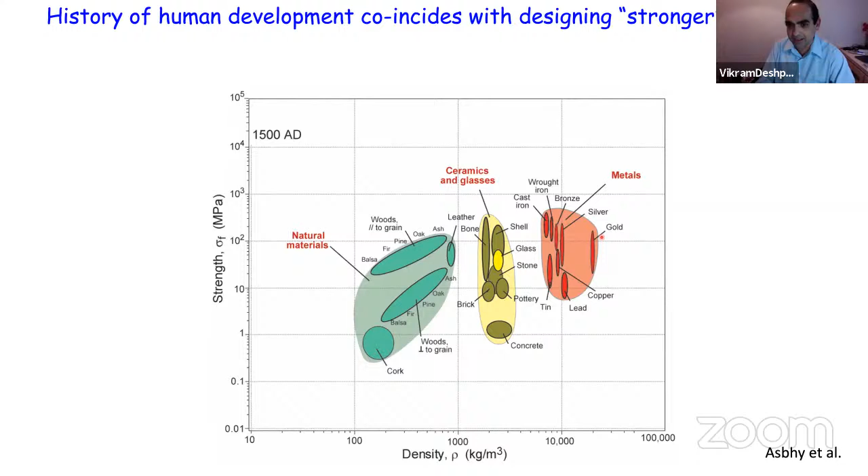Then if you go 1,000 more years, very little had changed. So from 50 BC to 1500 AD, not much had changed other than iron - some cast iron had come in. In another 400 years, you had added steel, which is a very big thing.

By the end of World War II, you had added some aerospace alloys, polymers had started to come in, and this is approximately what exists today as engineering materials. The main thing you can see is these low density foams and architected materials that have started coming in.

So there's this correlation between human development and designing of materials, and that has continued. Of course, in modern days you judge it by what science and nature papers you have, and there's plenty of papers coming out on which is the strongest, lightest material that you can make.

This is an Ashby plot, and effectively there are certain parts of the Ashby plot which cannot be attained. There are no materials that can ever be made there, by bounding theorems - you can't go out here. But there's lots of places where materials don't exist, but in principle materials could exist.

For example, the Hashin-Shtrikman bound with diamond as the starting point will tell you that a material in principle could exist along here, not that it has been made or we know how to make such a material.

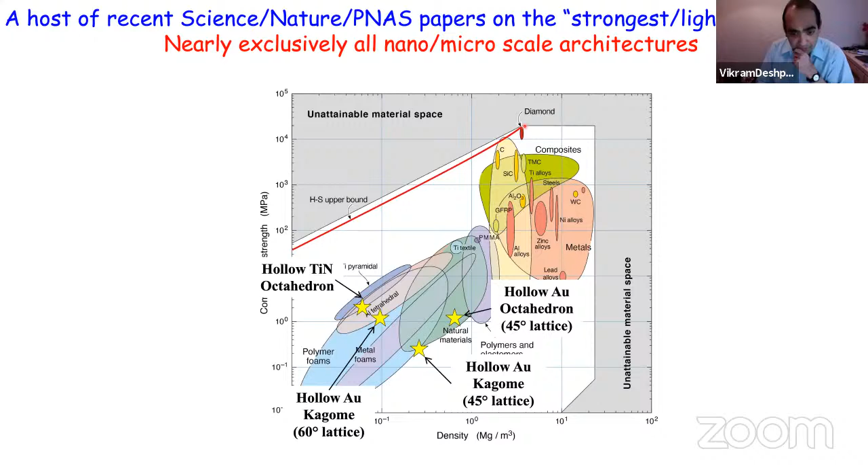So there have been lots of papers coming out with that, mainly nano and micro, as we were discussing earlier on. For example, I'm showing you some of the very early papers - these were all by Julia Greer, where they made nanomaterials, and they're sitting on the Ashby plot. Norman Fleck in his seminar spoke about gyroids, and this is where the gyroids will be sitting.

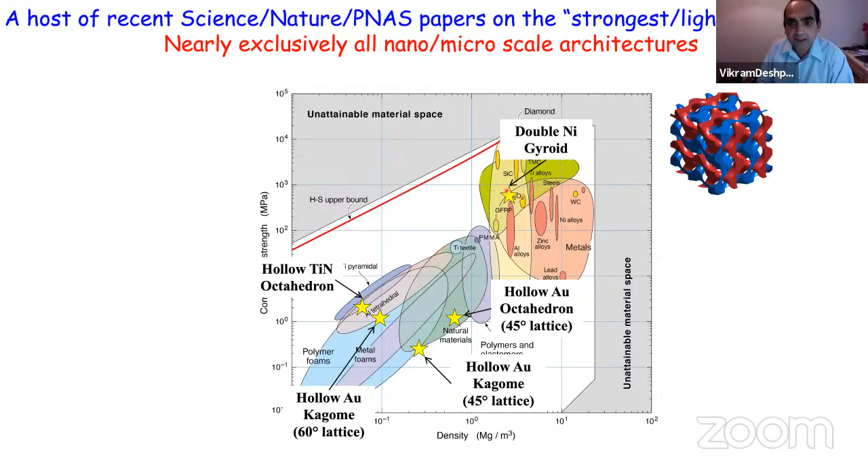Then there are papers coming out from the nanoscribe Karlsruhe group, and they're making materials - some of them, like this structure here, are truly getting into this kind of space in the Ashby plot. There are 100 other papers, which I apologize for not citing, where people have made lots of new materials which I have not spoken about here.

I'm sure there are other materials lying here too, but that's not the aim of this talk.

The aim of this talk is saying that suppose you can make these materials, what is it that you can do with them? I'm going to speak about one very specific application - there could be lots of applications to say that if you could make such materials, what would you gain?

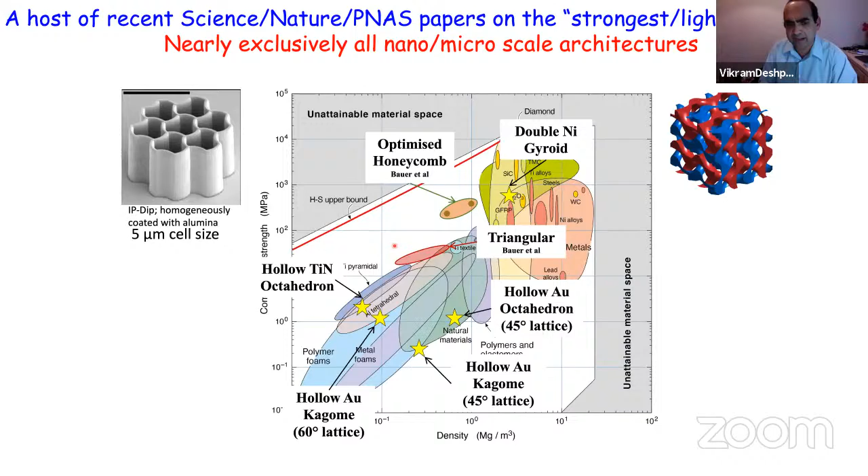The application I'm going to be discussing is mitigation against dynamic loads, because if you want to make strong materials, that's an obvious application, right? You'd think if you have something strong, it will work well for these kinds of dynamic loads.

So this is our structure, and there are two types of loads. You can have some buried explosive coming and hitting the structure, with a granular high velocity medium coming in, or you can have some kind of explosive with fragments coming from the side here, like that. So these are the two applications I will be discussing.

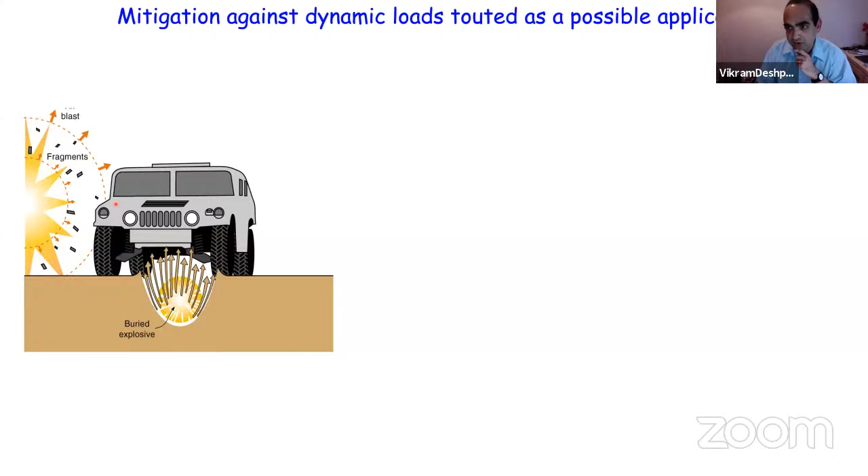So protection against high velocity granular impact - we'll think of sandwich structures with some kind of architected cores, which will help, and lots of different sandwich structures with different architectures. Similarly, protection against high velocity projectiles.

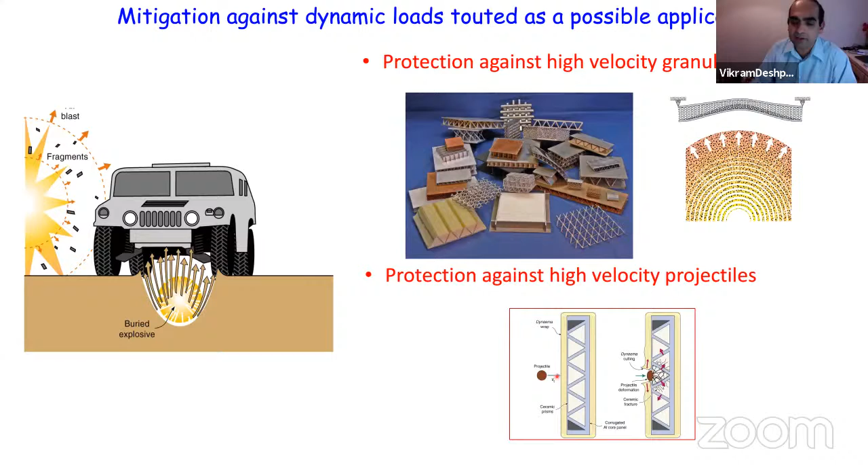What is it that you need? What kind of material properties do you really need to protect against high velocity projectiles? The underlying theme of the whole talk is: is high strength what you need for such applications?

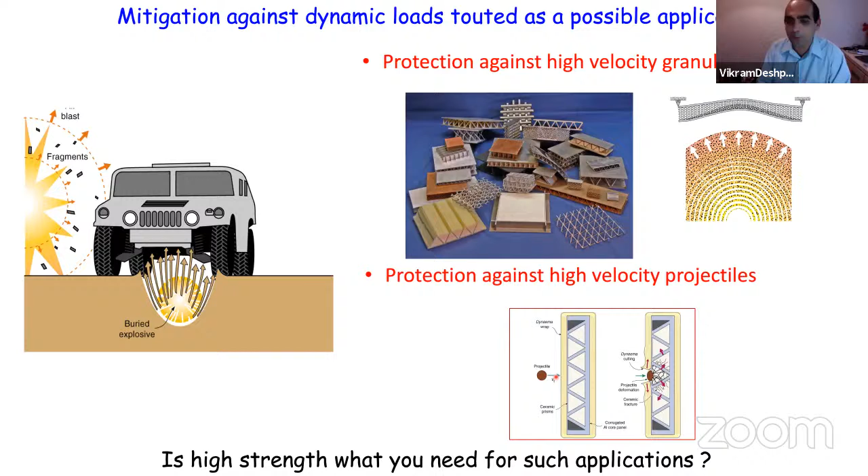You might say that's pretty obvious, that obviously I need high strength. But I hope to convince you by the end of the talk that it's not absolutely clear that high strength is always good. So that's going to be the aim.

Let's start with the first application: high velocity granular impacts. Whenever we talk about granular impacts, there are two problems that occur with dynamic loads. First, you have to understand how the loading was created on your structure, so we need to understand the interaction between the explosive, the granular medium, and the ambient air around it. Then we need to understand how the high velocity medium is going to interact with the structure.

So we're going to first quickly understand this explosive-granular medium-ambient air interaction, with a very simple experiment. My whole seminar will talk about simple experiments to try to understand these complex phenomena, and may or may not succeed in that, of course.

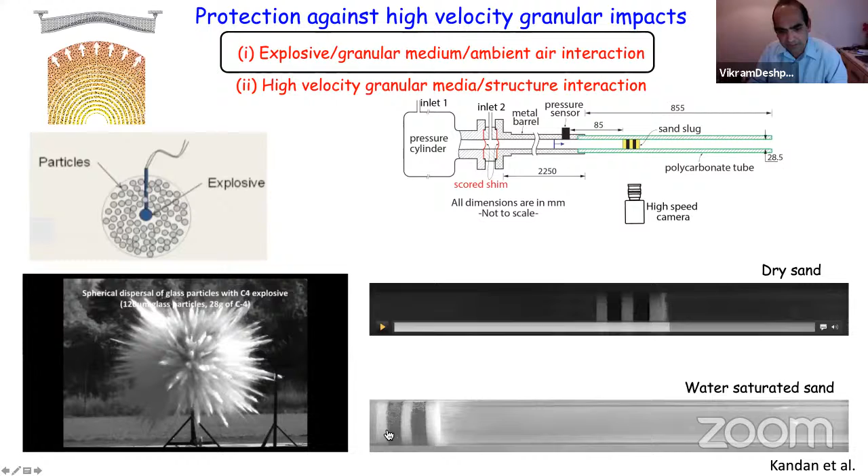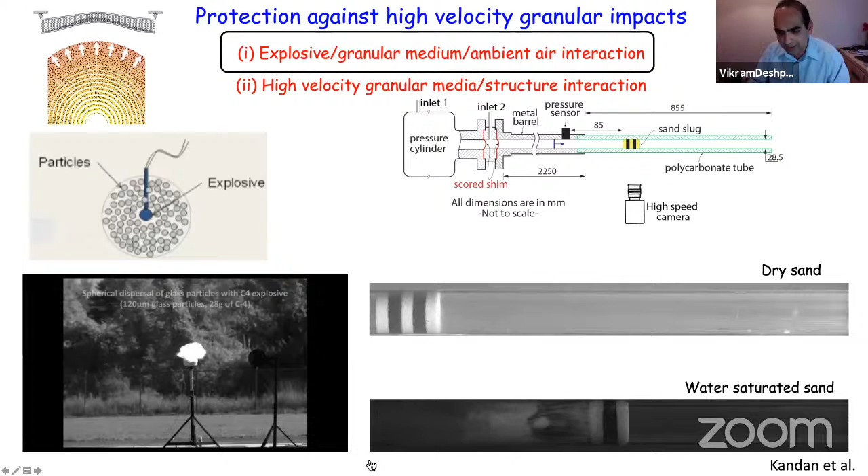Now you do that with water—if you water saturate the granular medium, this is what happens. Immediately, nearly on this rear surface, you get an instability forming, and you can see some kind of mixing and instability, but the front remains pretty stable.

So first, before jet formation—can we actually understand why this is happening? Can we do a really simple simulation to understand what's happening? This is my granular medium, described by a very simple, isotropic Drucker-Prager kind of solid.

What do I mean by a Drucker-Prager solid? It has some pressure dependency to its yield strength, and that pressure dependency is denoted by the friction angle, typical for a granular medium. But I'll assume non-associated flow, so the granular solid remains incompressible.

You do that, and you see what happens—you repeat that experiment now in the computer. This is the wet sand, and you do get an instability forming for wet sand, as you can see. For the dry sand, it's pretty stable, going very stably.

What is the difference in this Drucker-Prager solid between the wet sand and the dry sand? The only real difference is the friction angle. The friction angle for wet sand is nearly 0, while for dry sand it's pretty high, around 20 degrees.

So what's happening is that friction is stabilizing the fluid. In words: you have high pressure air interacting with this surface, and if the effective yield strength of the surface is low, you get something like a Rayleigh-Taylor instability happening on this face—the dynamic version of the Rayleigh-Taylor instability. What friction has done is that because there's pressure, it has increased the yield strength of that solid locally, and it has stabilized it.

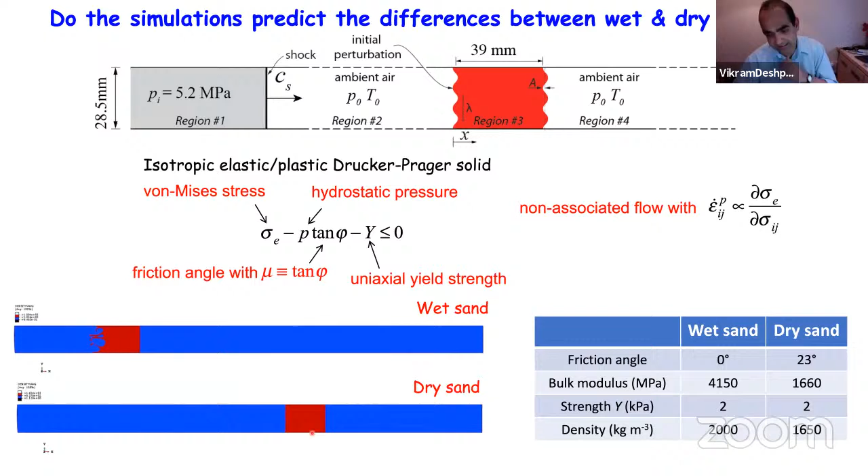That is the reason why you get this instability in wet sand, but not in dry sand, at least in this experiment. So the question is, why did you get this instability on the front face, with jets happening there? The answer is that it's really the Rayleigh-Taylor instability: when high pressure gas loads the granular medium, the surface goes unstable under dynamic loading conditions. When the granular medium moves through air very fast, it compresses the air in front of it, and that air exerts a back pressure, which causes the instability.

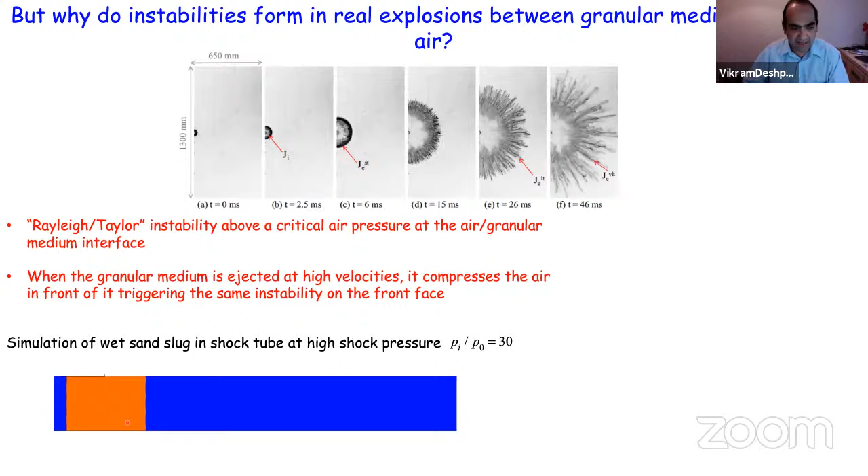If you simulate that, you'll see the front going unstable because there is air in front, forming that instability, and jets start to form. So why didn't this happen in my lab experiment, but it did happen in reality when that real explosive experiment was done? You need to move that slug really fast to compress the air in front of it sufficiently to create enough pressure to cause that instability.

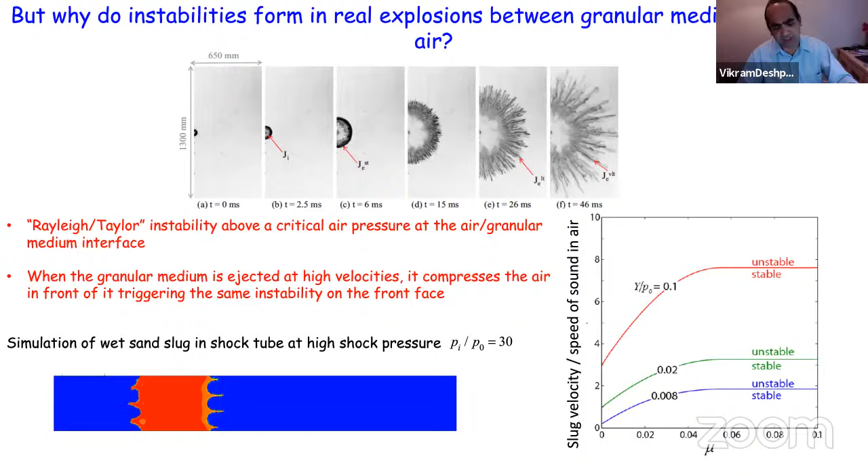So now we've understood how the granular medium moves through air. The next question is, how will this granular medium interact with the structure? We're now coming to the structure problem. Think of this: the granular medium is coming through, hitting this rigid structure.

The sand that has hit this structure has already densified, and as more sand comes in, you get densification here. This sand up here knows nothing about the existence of the structure, it's just coming, and you get a sharp densification front - a shock front. This is densified material down here, and non-densified up here.

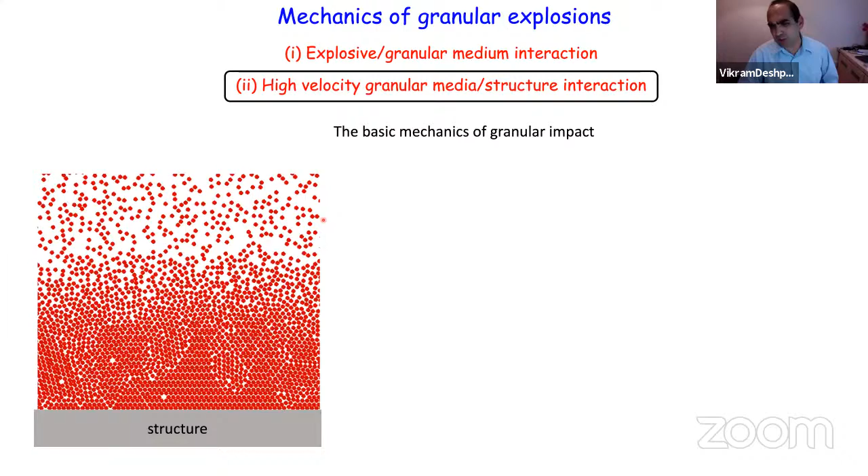This problem can be relatively easily understood with really basic mechanics. You can think of this as a simple material which has zero strength until you compress it and it reaches some densification strain epsilon d, and then it locks up. Thinking of it that way, you can understand what pressure this thing will exert on the structure as it impacts, by conserving momentum and mass across this shock front via two simple momentum conservation and mass conservation equations.

You get a Rayleigh construction, which tells you that approximately the pressure exerted on the structure is rho v squared, where rho is the effective density of the sand, the smeared out density. So it's basically telling you that it's exerting a hydrodynamic pressure on the structure to a first order. This is really very basic mechanics.

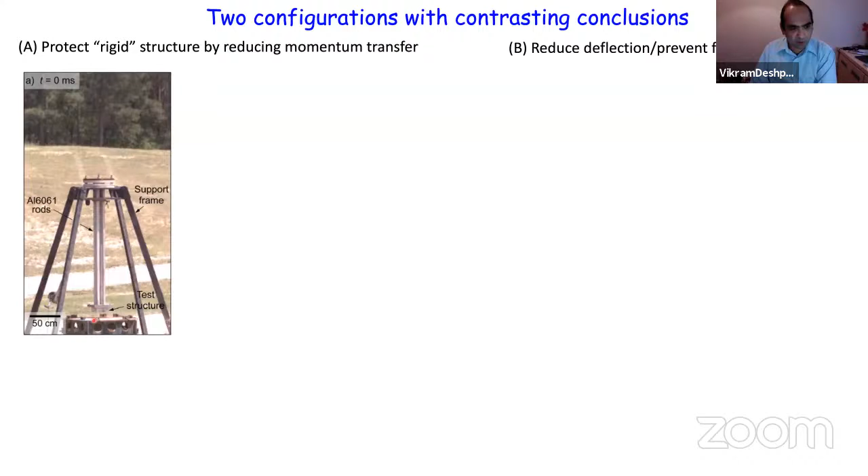Now we want to understand what happens if you have this high velocity granular medium impact a structure. What kind of structure do we want to design? For that, we need to define some kind of realistic situation, and there are two situations we'll think about - these were some experiments by Haydn Wadley. You have a structure where you explode something here and the granular medium comes and impacts it.

What happens is that the granular medium just makes the structure jump upwards, as you saw here. Why is this interesting? Well, if you thought of that vehicle, you have an explosion happening underneath, and the vehicle jumps up in the air because of the momentum transferred to the structure. So the question is, can we reduce the momentum that is being transferred to that vehicle?

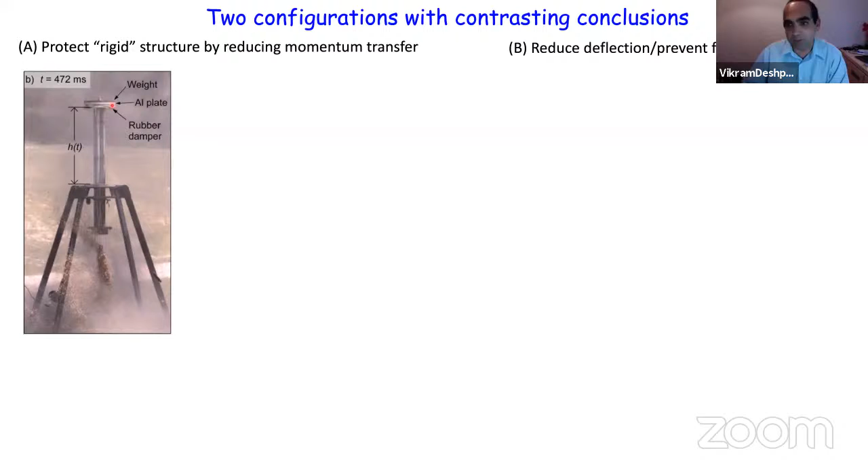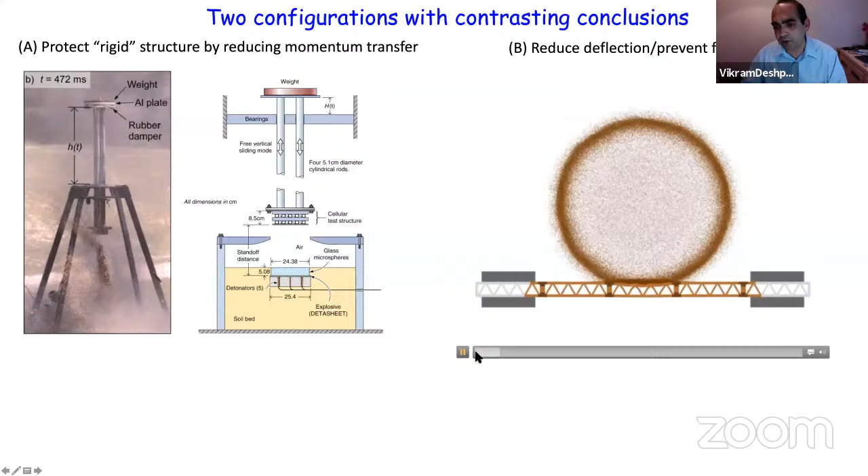Can you reduce the jumping up of the structure? That's one possible question. Another is to design an apparatus like Haydn Wadley's. Or suppose you just want a plate and want to stop its failure against granular impacts—what's the best sandwich structure to design for that?

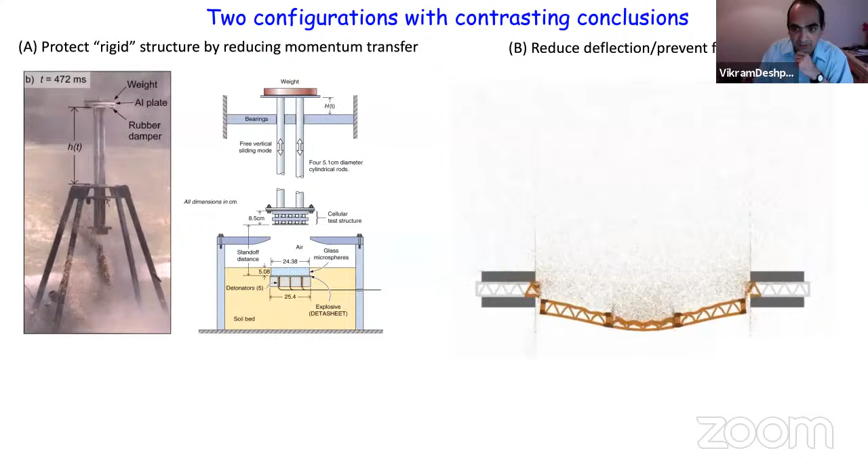Let's think about the first problem, the jumping problem. We're considering a cellular sandwich core with a face sheet, and granular ejecta coming and hitting the structure. We're plotting the momentum transferred to the structure, measured and divided by the momentum that would be transferred to a rigid structure, against the strength of this cellular medium divided by the hydrodynamic pressure the sand exerts.

What you see is interesting: there's an intermediate value of this non-dimensional group, strength of the sandwich core divided by the pressure, at which you reduce the momentum by about 30%. This solid line is a prediction I'll explain. So you don't want a core that's too weak, and you don't want one that's too strong either—we'll try to understand why.

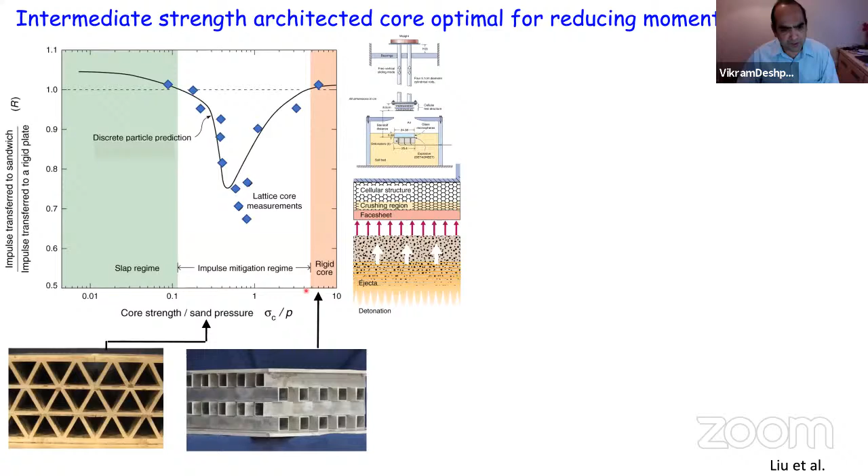You can design different architectures for these different strengths. An intermediate strength would look like this architecture, a stronger one would look like this. A high strength core doesn't do anything because it behaves like a rigid plate—it doesn't deform, so you go to the rigid plate limit at high strength. The question is what's happening at low strength and intermediate strength: why does low strength transmit so much more, and why is intermediate strength optimal?

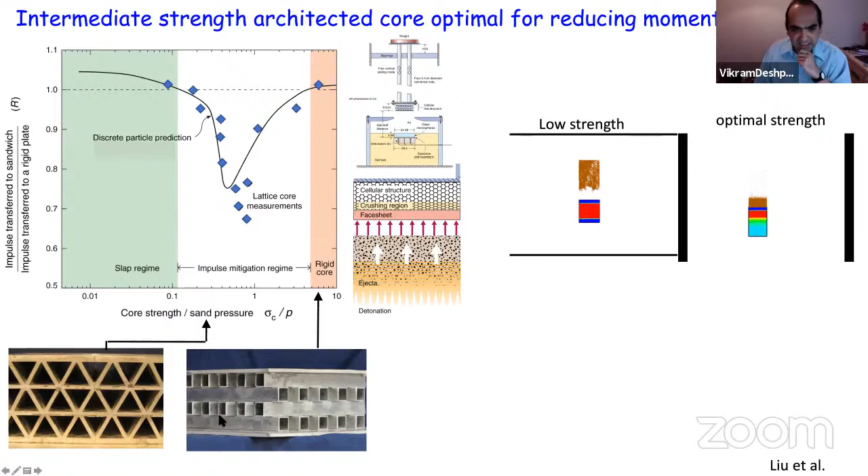In these intermediate strength cores, you basically get a plastic-like collision. The lesson we've learned is that once we know what strength we want, we could in principle backtrack to find the architecture of the core we want. But the lesson here is that you don't want something too strong, and you don't want something too weak either.

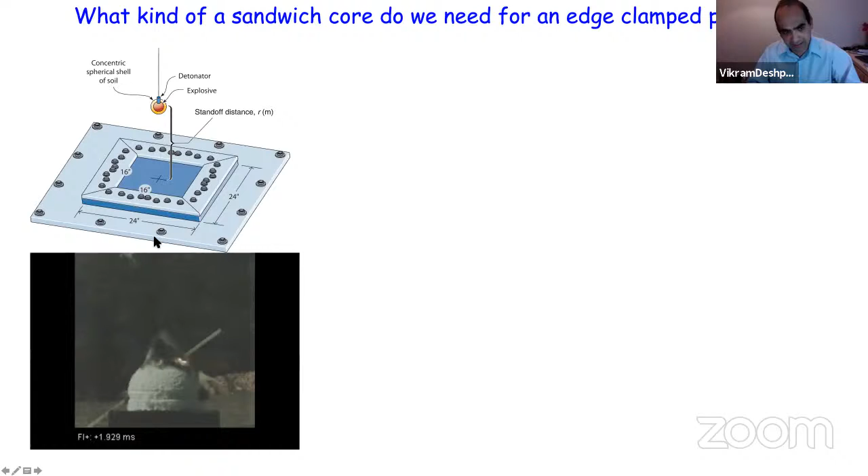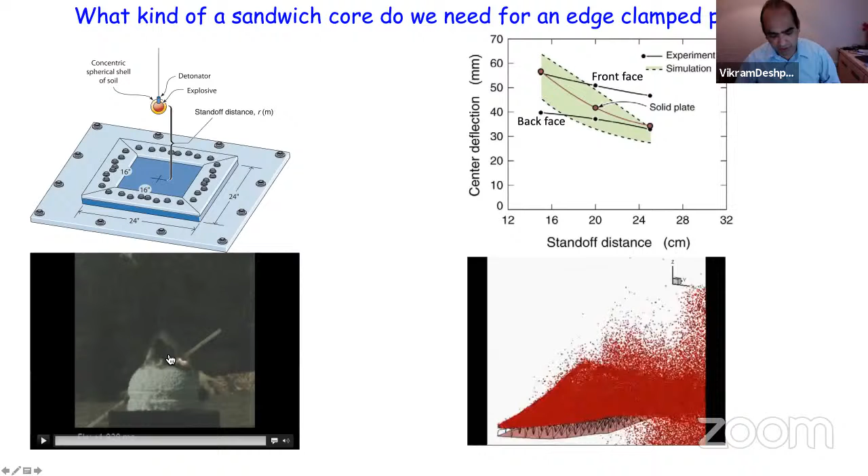At this point, there's some evidence to suggest sandwich plates, with appropriate cores, are doing better than the solid plate. But I'm not sure, because there are too many uncertainties with this real explosive event. So we go back to our Cambridge lab and ask: can we do simpler experiments, much simpler, where everything is well controlled? Because it's well controlled, we'll be able to simulate it.

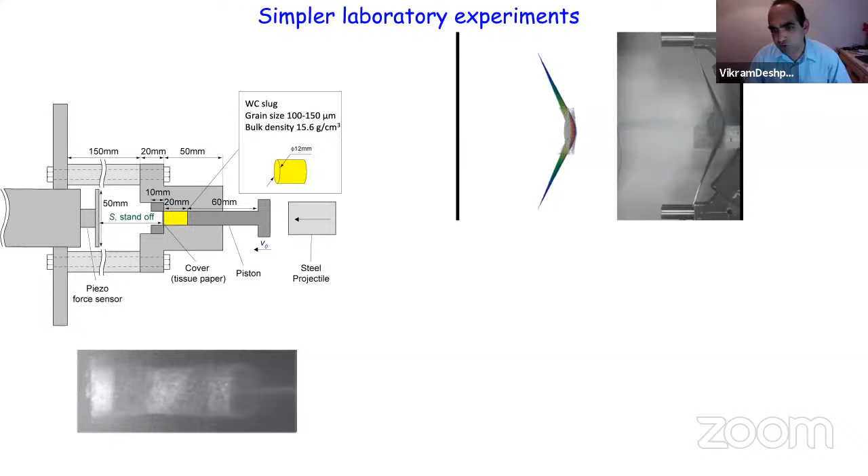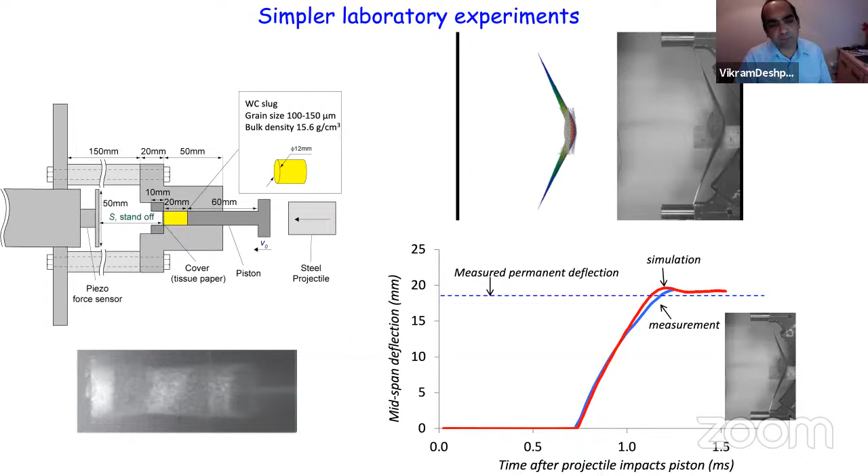We're getting extremely good agreement between the experiments and simulations, including if I just plot the mid-span deflection as a function of time—it all looks rather good. This tells us we've got a good simulation capability and good handle over the experiments, and now we can really use these experiments to probe what we want in terms of the design of structures that will help.

So again, we're going to do baby experiments, and the aim isn't to say what the core of the sandwich should be, but to ask what properties we need for the core. We take these types of sandwich beams—they all have simple hexagonal honeycomb cores—but interestingly, because hexagonal honeycomb has anisotropic plastic properties, we can play lots of games.

I can change the thickness of this core. I can rotate the core in the LW plane, and when I rotate it, I keep the compressive strength in the T direction the same, but change the shear strength in the longitudinal direction of the beam.

So I can make a core with high compressive strength and high shear strength. I can make a core by rotating it in the T plane, having high compressive strength but low shear strength. But if I rotate it completely, so it becomes like a hexagonal honeycomb where this is the in-plane direction—W is now the vertical direction—then I've got a core with low shear strength and low compressive strength.

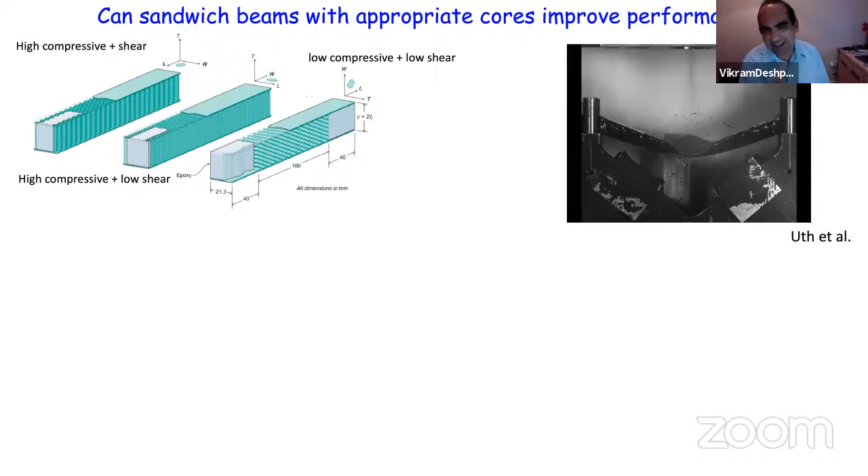So then we can try to understand what we really want from these sandwiches to get optimal performance. We do these kinds of experiments, impacting sand slugs—actually tungsten carbide granular particles—against these beams, and this is the sort of deflection we can measure.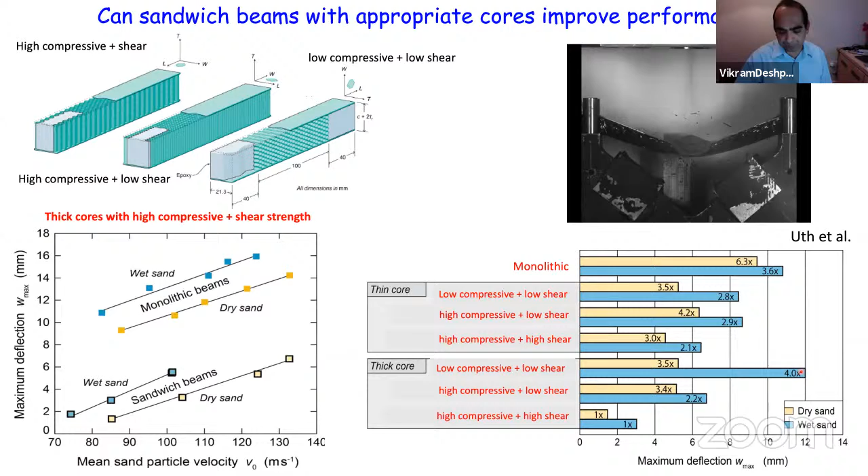So in this particular case, high strength is extremely good, and you need thicker cores rather than thinner cores to help. Though, of course, in some cases thick cores, if very badly designed, can do rather badly. So we use simulations to really try to understand why this is the case - why high strength thick cores are optimal for this particular application.

So the question is, why is it the case that the simulations behave this way? The answer is rather simple: as you increase the core thickness or core strength, you decrease the core compression. When you decrease the core compression, you retain the bending stiffness or bending strength of the sandwich beam. This is traditional sandwich theory, telling you that if you separate the face sheets by a large amount, you increase the bending strength.

That is the simple reason why you get this effect of a thick core and strong core helping. To explain this visually: as you increase the core strength, you hardly compress the core. A weak core is compressed a lot and loses all its bending strength, while a strong core retains the separation of face sheets and retains the bending strength, performing well. If you increase the core thickness, the same thing happens - in the highest strength case, you've retained this separation, giving you the good effect.

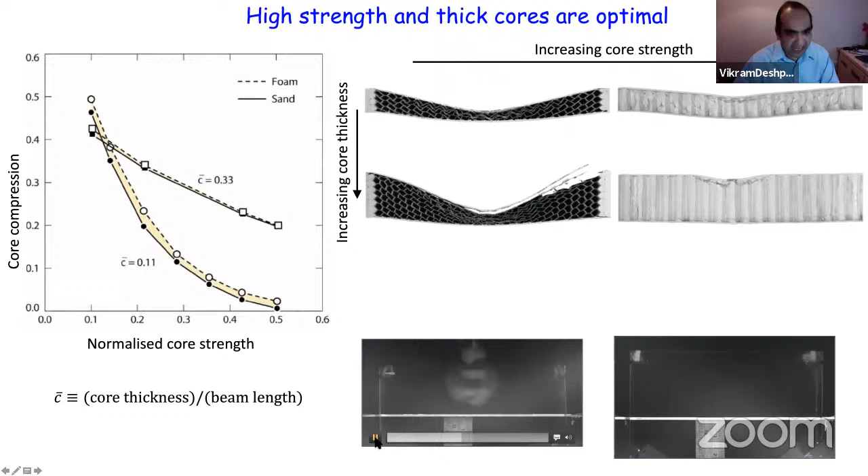Now, in these simulations, there's one more thing shown here - we've shown simulations of what I'm calling sand impact and foam impact. Now, what is this foam impact? Because I've been talking about sand impact all this time. This is the sort of impact event we have been discussing until now, where sand comes and hits it.

And this is the foam impact equivalent. What you can see is that a piece of metal foam is doing something extraordinarily similar to the sand, in that it's just compressing itself against the structure it comes and hits. What I'm showing here is that if you take a metal foam of the same momentum as the sand, both via simulations and experiments, you get behavior that's very similar.

Now why is this important? It's important because doing these sand experiments is extremely difficult, while doing these foam experiments is much simpler. So I'll proceed by basically always using these foam experiments from now on, because they're so much simpler to do rather than using the sand experiments.

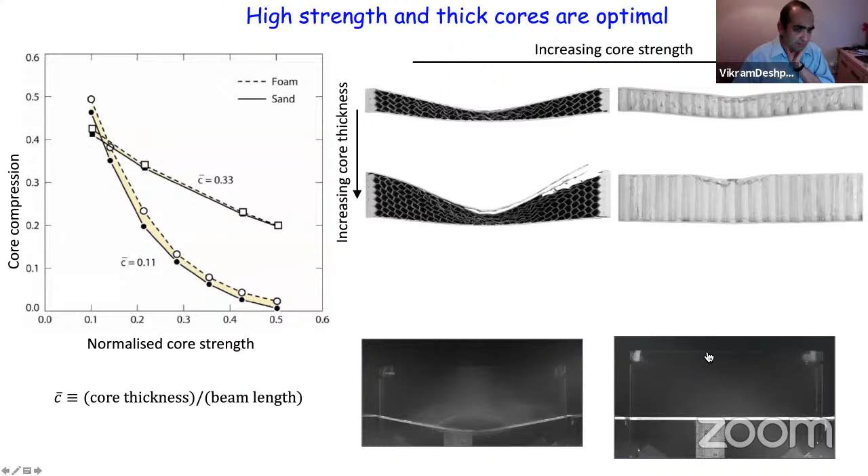So we are saying that these sandwich structures can do remarkably well, but I've looked only at metallic sandwich structures. The question is, can we do much better than these metallic ones? We go back to these Ashby plots and ask, what happens if you make materials in here? Till now we've been making these kinds of metallic cores. What happens if you make

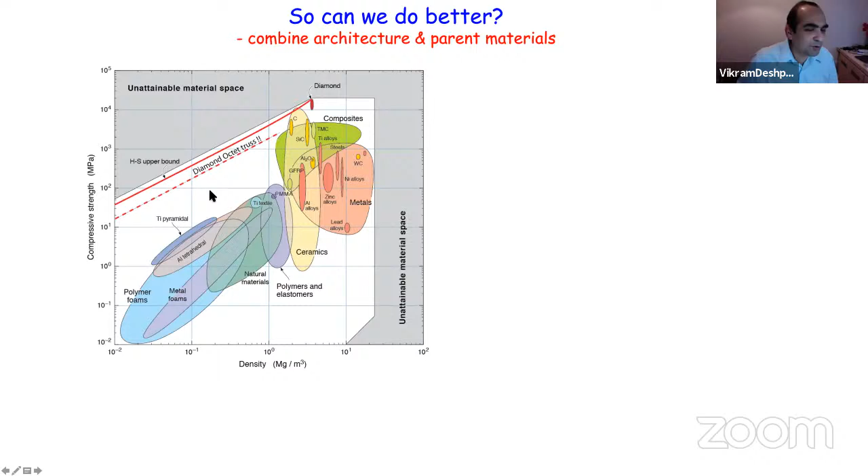architected materials sit here? In principle, we could make the so-called octet truss with diamond. That's not practical, of course, but what would happen? I'm going to talk about something much more practical and say, let me make materials in here, and they're actually not that difficult to make if you give up on metals and go to carbon fiber composites and other sorts of composites. If you go to other composites, you can make architected materials that live here. So there is some hope to do even better.

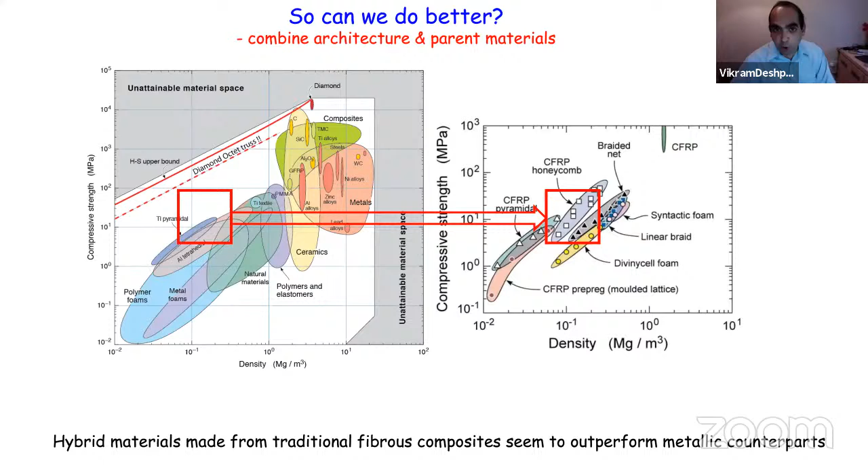But unfortunately, there's a catch, and let's explain this. So this is a honeycomb, a sandwich panel with a square honeycomb-like core. If you make it out of stainless steel, these are the deflections as a function of the impulse, and these are measurements. But if you make it exactly the same mass and make it out of carbon fiber, you're doing much better than the steel.

But the catch is that carbon fibers are brittle, and because they're brittle, they fail here. While the metals will not fail, they will just continue to go up to much higher impulses and deflections—they're ductile. The carbon fibers fail, and this simulation shows the carbon fibers have completely failed; they have a 1 or 2% failure strain. Nobody is going to use a structure that does better if hit slowly but completely collapses if hit hard. Nobody will actually use such a structure.

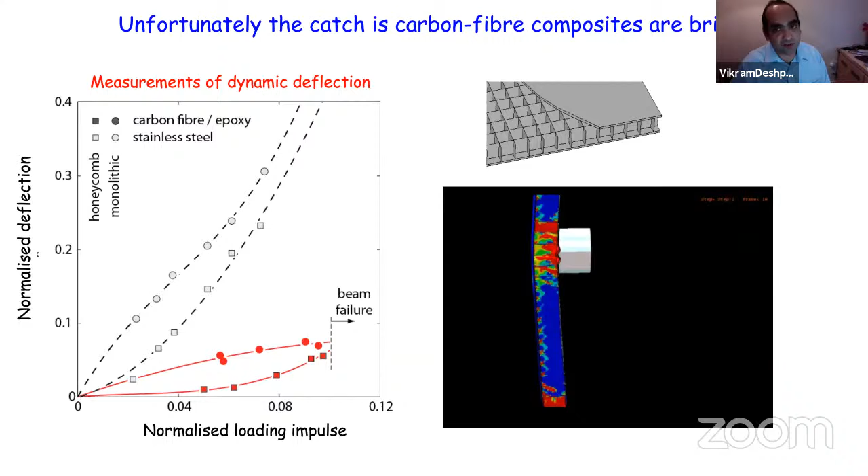So the question is, can you make carbon fiber composites more ductile? That's a tricky situation, because the carbon fiber itself has 2-3% ductility at most. So how can you make carbon fibers more ductile? Again, we will try to see whether

architecture can help here. So we're thinking of a composite which is 3D but non-woven. You have tows in 3 orthogonal directions, interwoven—not woven, really. These are what they call in the carbon fiber literature, 'noobed,' basically just interlaced in some way.

And we do a compression test in that Z direction. We are effectively compressing these Z direction tows because the other tows are doing very little. We plot the compressive stress against the compressive strain for 4 different experiments, loading and unloading. Look at the strains reached for specimen D—we could have gone much more—we reached compressive strains of 10% or so, with no sign of catastrophic failure.

There is, of course, nonlinearity. There was an elastic regime, and then a nonlinear regime. When you unload, you're basically returning nearly to where you started, with no catastrophic failure that typically occurs in the compression of carbon fiber composites. Why is that the case? It's interesting, because here we're showing micrographs of specimens A, B, C, and D after the unloading event.

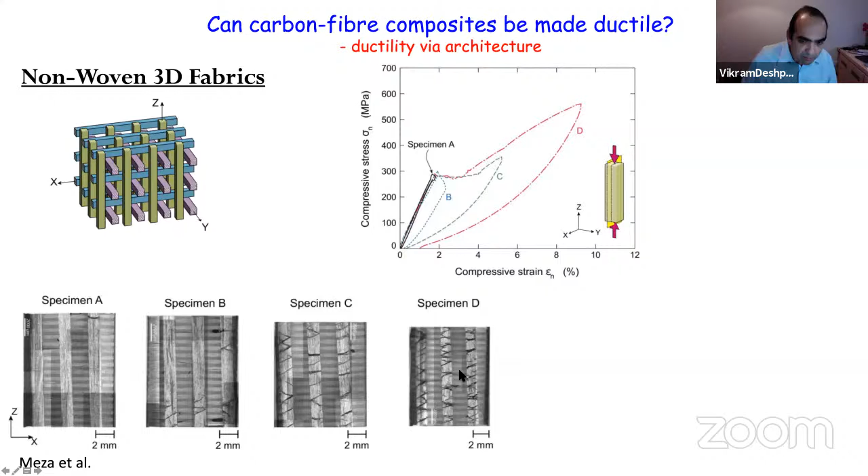Specimen B, you can see these are those Z direction tows. You can see some kink bands. In specimen C, you can see more kink bands. In specimen D, you can see even more kink bands.

Now, this is really interesting because if you look at it more closely, you see that this is a traditional kink band in the sense analyzed by Budiansky and Fleck and many others, where these fibers have kinked here and you're getting kinks. But in normal carbon fiber composites, you get a kink that completely traverses the specimen, and you get an unstable failure occurring.

But here, what has happened is that you're getting the kinks zigzagging. Basically, they reflect inside the tows, and you're getting a rather stable situation. So all that's happening along this curve is that you're getting more and more kinking.

So while, of course, we have not changed the ductility of the carbon fiber itself, the overall specimen ductility has gone up more because you're consuming the tows with these kink bands rather than just getting one kink band that goes unstably across the structure. So that's what's happened in this case.

Now, this translates into shear as well. This composite is extremely ductile even under shear loading, and this is the experiment to show that it's 50% strain and it's still not undergone catastrophic failure. Although the reason for this ductility in shear is very different: you've got fibers in all directions, so you don't get these kind of delamination failure events that occur in typical, at least 2-dimensional, composites.

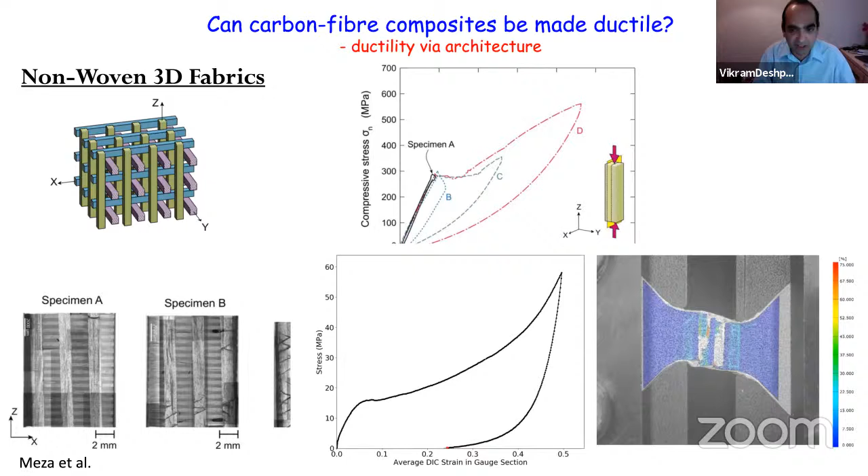Okay, so we need new models to account for these cases, because the strains are so large the tows evolve in microstructure. So we analyze each tow separately, discretely, by a crystal plasticity model with 6 slip systems in each tow, because we think of this toe, with these fibers in the toe, as having discrete slip systems within each toe.

But there are only a limited number of available slip systems, under which otherwise you'll have to get elastic deformation of the fibers. There's something more interesting too: these fibers are rigid compared to the matrix, so this is like a granular medium. And like any other granular medium, you'd expect pressure sensitivity, because effectively as these toes move, they have to move apart a little bit, so there's some kind of local dilation effect happening. So this is a straightforward crystal plasticity model with pressure dependence included.

And if you use that—this is Lucas Meza's work—when you do this compression test you can see that you start predicting these kinds of kink reflections, etc. And all the tows are discretely modeled.

Similarly, if you start modeling those shear experiments, the black line is the experiment, and the orange line is the crystal plasticity model with the pressure sensitivity. If you don't include the pressure sensitivity of the shear strength in the tow, then you start under predicting the experiment. This is really important because you'd think this is a shear test—why would I get pressure building up at all in these specimens?

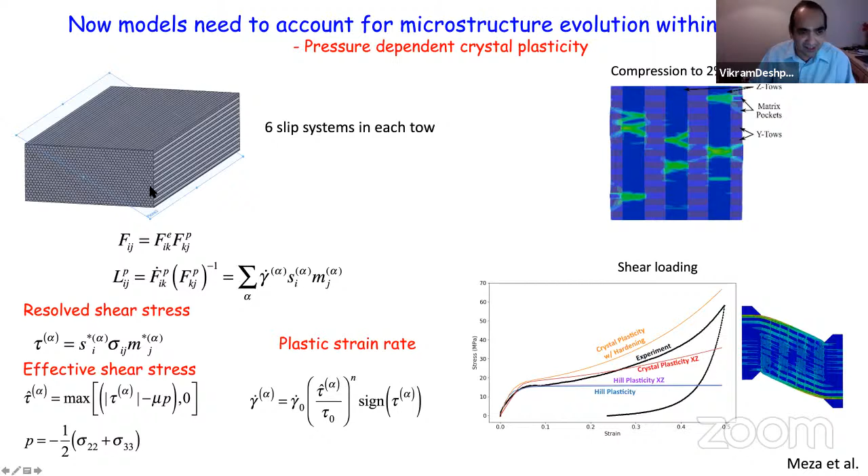You might also say, why did you do all this complicated crystal plasticity? You could have just modeled each tow as a Hill plasticity model with all the anisotropies. And if you do that, that's this line here—hill plasticity basically does not predict the hardening that you're getting. This hardening is because the microstructure within each toe is evolving, which is captured by the crystal plasticity. If you did hill plasticity, you just wouldn't capture it. So you need all this complication to capture what are relatively simple tests.

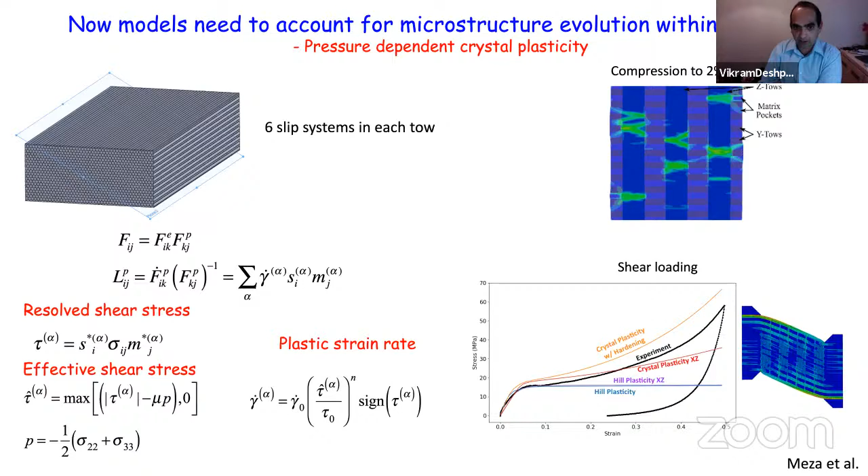Okay, now that we've convinced ourselves that we can make ductile composites, what happens, right? Can you do now better?

So now the problem that occurs is if you want to really use these composites for those kinds of structures, you need to avoid the joint failure problem in composites. This is always a problem in composites, that you get massive joint failure. This is a Swedish company that really helped us make such sandwich beams by a complicated weaving process.

What they have done here is that there is no joint within the structure. A fiber that starts at one end of the structure ends at the other end, and that's it. You can see what's happening at the joint: a fiber comes this way, goes that way, and goes back upwards, etc. So effectively, it's a completely integrally woven structure, much like a natural structure, like when a branch comes out of a tree, there's no connection—the fibers on the branch come into the tree trunk, etc.

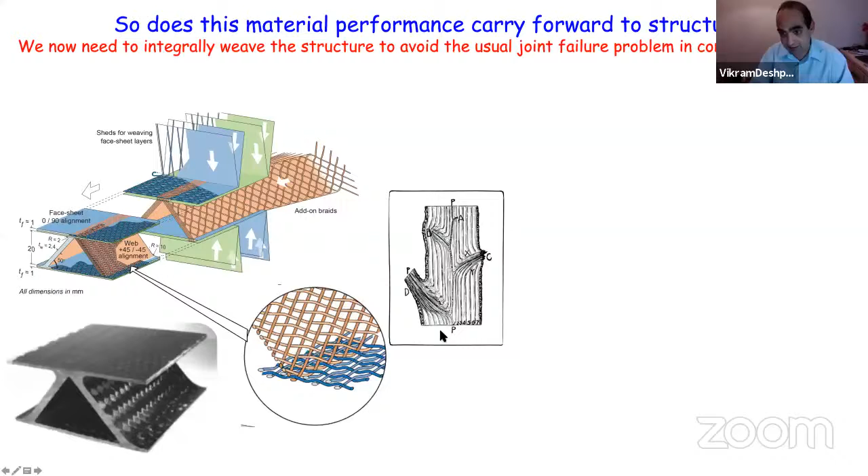Now, if you repeat this experiment with the metal foam rather than the sand projectile, this is what you get: you hit that composite structure and break the metal foam. The front face has failed, the back face of that sandwich beam has not failed, but the metal foam has gone. We make an aerospace grade aluminum structure with the same mass, same topology, and everything else the same. It's extremely ductile, the aluminum structure, but it still doesn't do as well as this effectively three-dimensional composite structure, because you can see that it's just failed in this manner.

Now, we are not capable at this point of modeling these kinds of experiments, because all the modeling I showed you was required every tow in the structure to be modeled discretely. And we are not capable of modeling every tow in this structure discretely. There has to be some kind of homogenization that we'll have to do, but we haven't yet come to doing that. Okay, so that was problem number one.

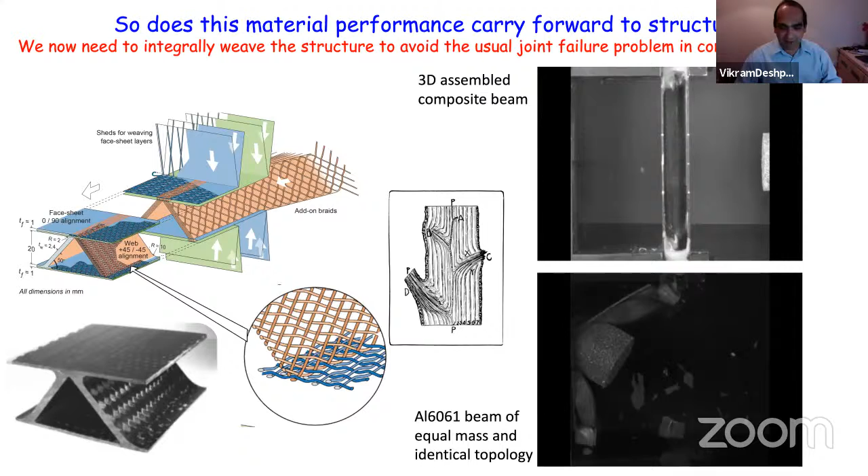I'll go on in the next 10, 15 minutes to talk about problem two: protection against ballistic threats. What do I mean by ballistic threat? You have some impact event happening like that, and the question is whether this thing, the projectile, goes through or not.

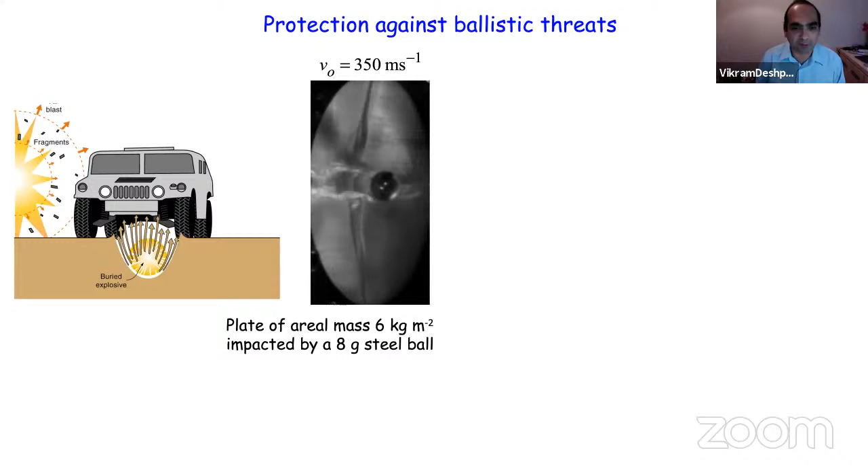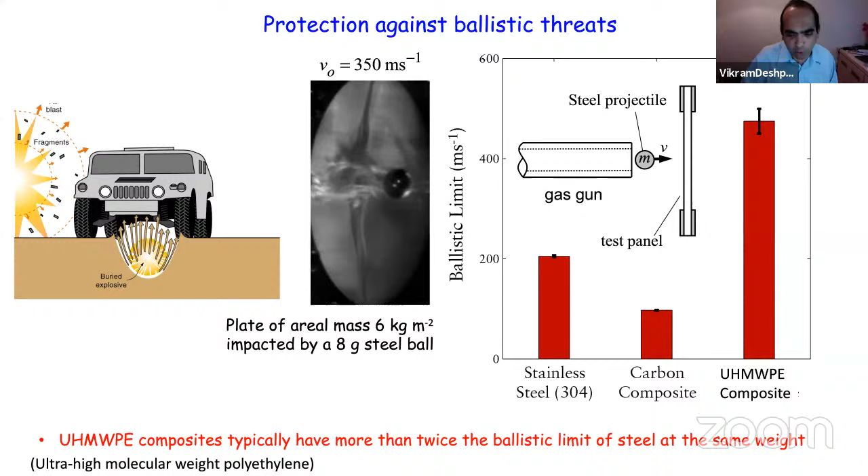So if you basically take three different types of plates made out of steel, carbon fiber composites, or what I'm calling here ultra high molecular weight polyethylene composites, this ultra high molecular weight polyethylene composite seems to do remarkably well. They have twice the ballistic limit of steel and maybe sometimes even more. So what are these? Before we really try to understand what we can do with these ultra high molecular weight polyethylene composites, let's try to understand what they are and why they really work.

Okay, so ultra high molecular weight polyethylene is very simple. This is Honeywell in the US and DSM in Holland that basically make such composites. They start with normal high molecular weight polyethylene and they extrude it—these are patented processes, and to be honest, I don't know exactly how they work. Then they can extrude it to get very long chain, extremely high, millions in molecular weight fibers. Once you get these fibers, you make them into composites, which look something like this, typically 0-90 composites. So that's what these composites are.

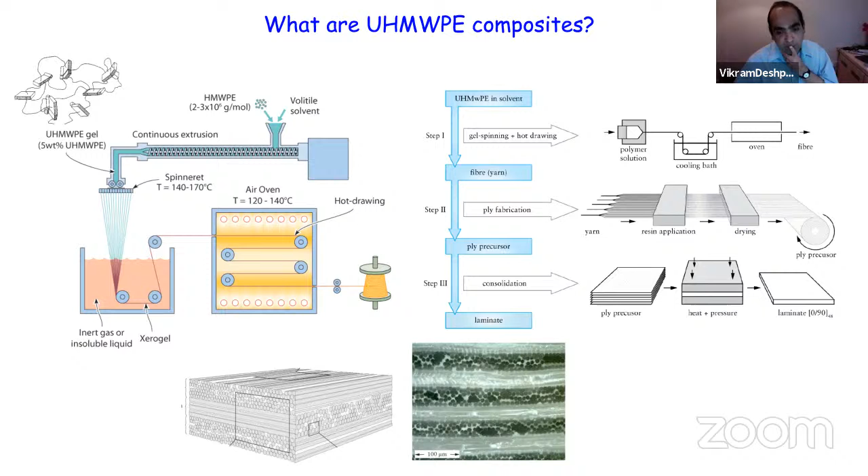These fibers are extremely strong. They have strengths on the order of 4 to 5 GPa sometimes, and that's why they are used basically. So to put it in context, why is it that you're interested in polyethylene fibers rather than carbon fibers or Kevlar or something like that? It's interesting to understand why these ultra-high molecular weight polyethylene composites are such good materials for ballistic resistance.

This was work done by Phil Cunniff at the Army Research Lab in Natick. He came up with a non-dimensional group, or a scaling group, which is the energy absorption per unit mass, multiplied by the wave speed—this has units of velocity cubed. What he said is that the ballistic limit divided by this u-star to the power one-third, which will now have units of velocity, will scale with the mass of the plate divided by the mass of the projectile. Now, these mass of plate and projectile are structural parameters you have no control over.

So if you increase this u star, you've increased the ballistic limit, meaning the velocity at which the projectile will go through the structure. We can plot this on an Ashby type plot, showing energy absorption per unit mass versus longitudinal wave speed, with dotted lines as contours of u star to the power 1/3. You want to be as high up as possible in u star. Kevlar is here, carbon fibers are here, and ultra-high molecular weight polyethylene composites are here, doing better than Kevlar and carbon, which is why people consider them.

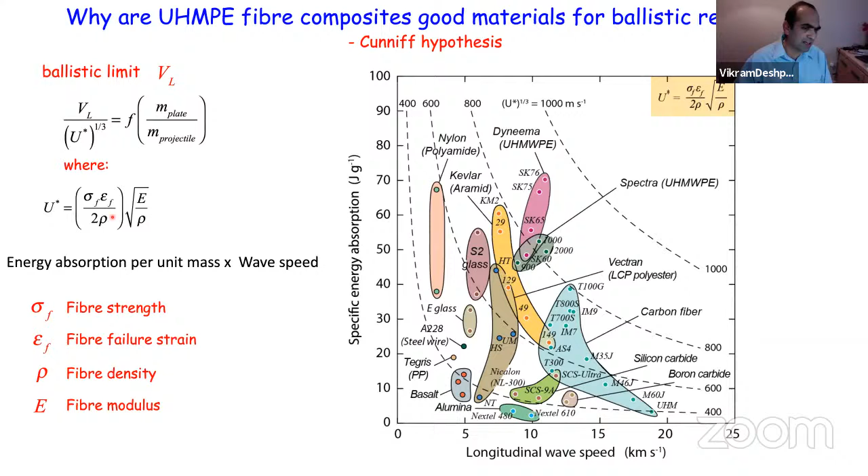Let's understand why this parameter, energy absorption per unit mass multiplied by wave speed, matters. Phoenix and Porwal in 2003 gave an explanation for this, qualitatively: a projectile hits and a wave starts to propagate through the material. The amount of material engaged in the stopping process is proportional to how far this wave has gone, hence wave speed comes in. How much it stops depends on how much energy can be absorbed. So approximately, you need both high wave speed to engage more material, and high energy absorption to absorb the energy.

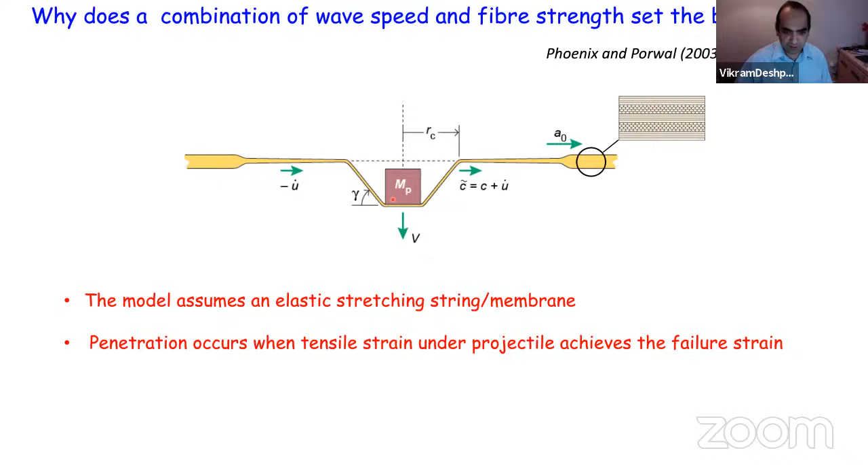But if you do an experiment, something doesn't stack up, because there's no mention of shear strength of the composite in this story. So we keep the fiber strength fixed and vary the matrix, changing the shear strength, and look at the ballistic limit. For the ultra-high molecular weight polyethylene composites, as you increase the shear strength, the ballistic limit decreases. Same thing with carbon fiber composites - as shear strength increases, ballistic limit decreases. This tells you something is wrong, or rather incomplete, with that explanation.

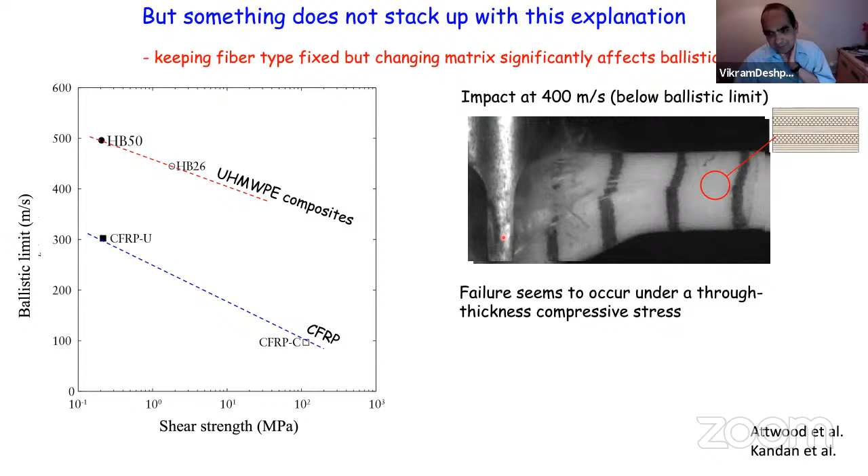If you do this experiment - impact of an ultra-high molecular weight polyethylene composite beam with this kind of architecture - look what happens: you get failure underneath the projectile when no wave has propagated yet, nothing has happened, and it's just uniaxial compression-like failure. The back surface has hardly moved either. As you go further, you see the beam shearing a lot, so maybe shearing is important as well. Really, failure seems to occur by just through-thickness compressive strength, without the complication of bending. Let's understand why that's the case.

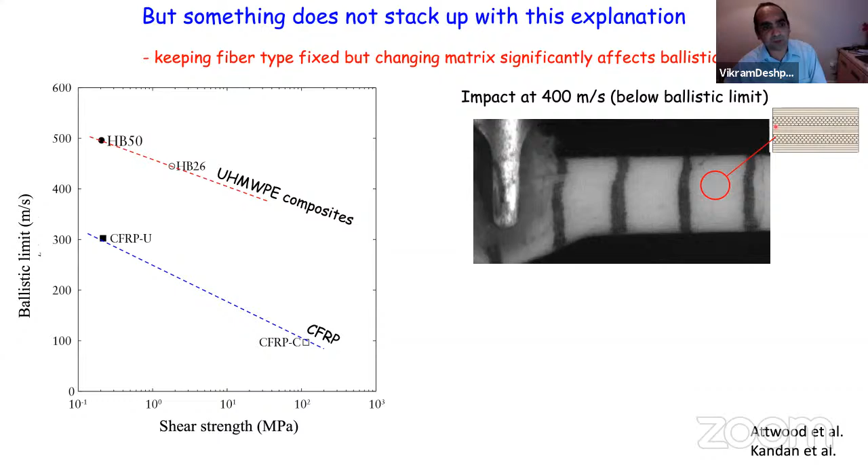Why would you get failure when you compress this composite under uniaxial compression this way? If you take a UD composite - normally these are 0-90 composites, but we don't do that, we make a unidirectional composite - and compress it, this is what happens: it just compresses that way, and that's it, no failure at all. But if you make it into a 0-90 composite and compress it, something completely different happens - you get enormous strength, and then it just bursts, completely explodes, and you don't get the ductile behavior you saw before. You get significantly higher strengths - the UD went up to 100 megapascals, but this failed at 900 megapascals.

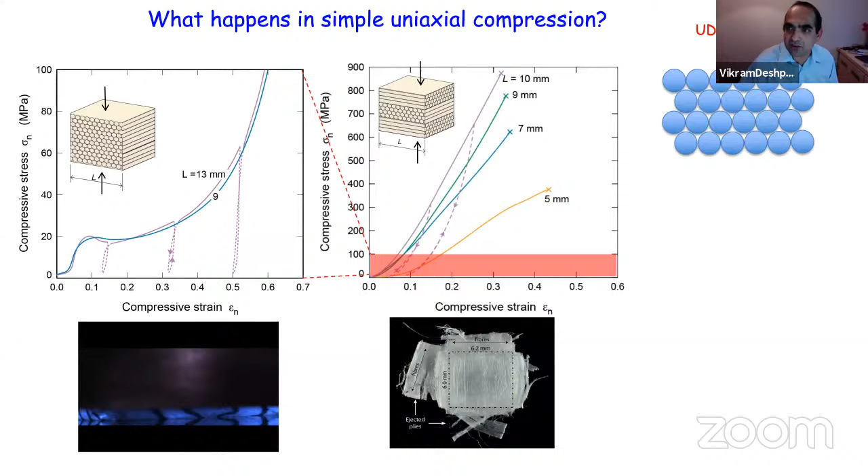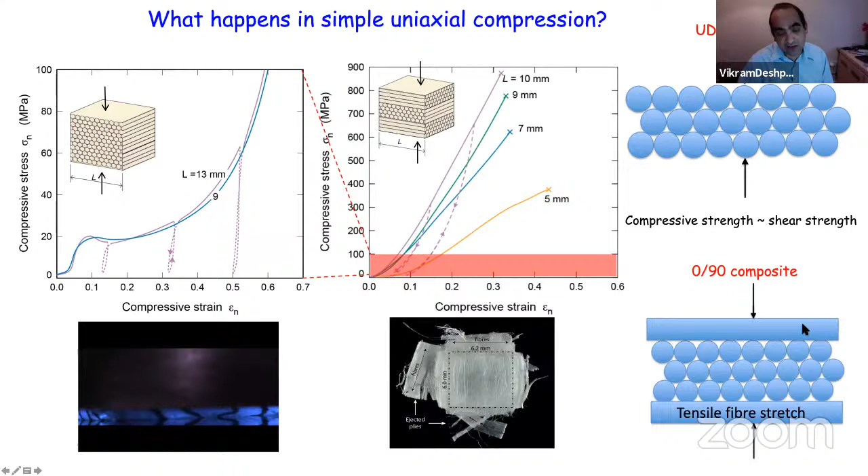The reason this happens is that under uniaxial compression, a UD composite will just compress like a bunch of logs - if you press it, it'll shear over like that, and that's how compression occurs. But if you make it into a 0-90 composite, something completely different happens. As you compress it, these 90-degree fibers, because they're effectively bonded and shear lag has developed some shear strength, basically end up stretching those fibers in tension. So now, to compress the composite, you need to push the 90-degree fibers into tension, which completely changes the deformation mode and hence the compressive strength.

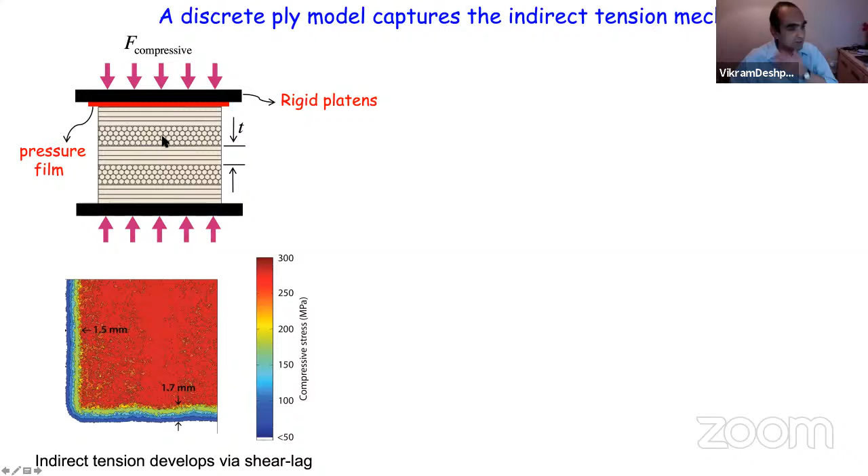We can do experiments to understand all this. Of course, to get this kind of behavior, you need to build up a shear lag, and we can measure those shear lags in experiments. We put a pressure film here, and we can actually measure the length over which that shear lag develops, and you develop that kind of indirect tension. I call it indirect tension because we are compressing it, but we are putting the fibers into tension. That's what's happening: compression in this direction is putting these fibers into tension because these 0-degree fibers want to expand in a Poisson manner, basically.

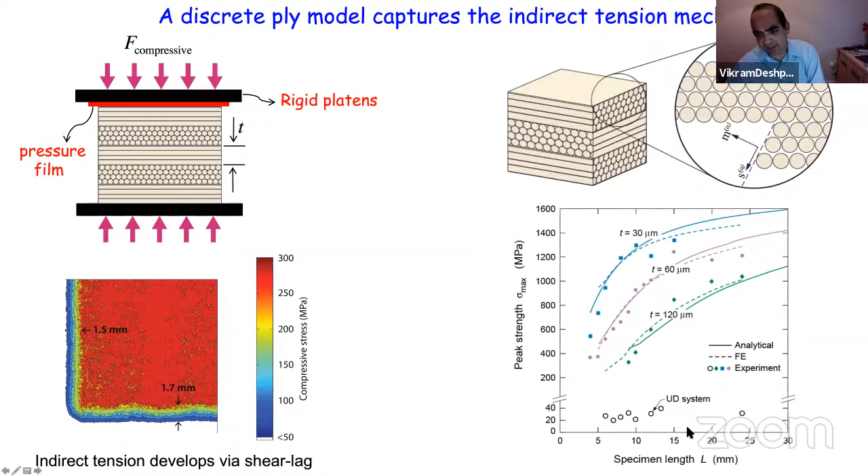We can use the same kind of crystal plasticity framework for each ply that we had earlier, and basically, the peak strength agrees relatively well with the experiments over different ply thicknesses, because the shear lag effect means ply thickness matters, as does specimen length. So we think we have an understanding of the problem.

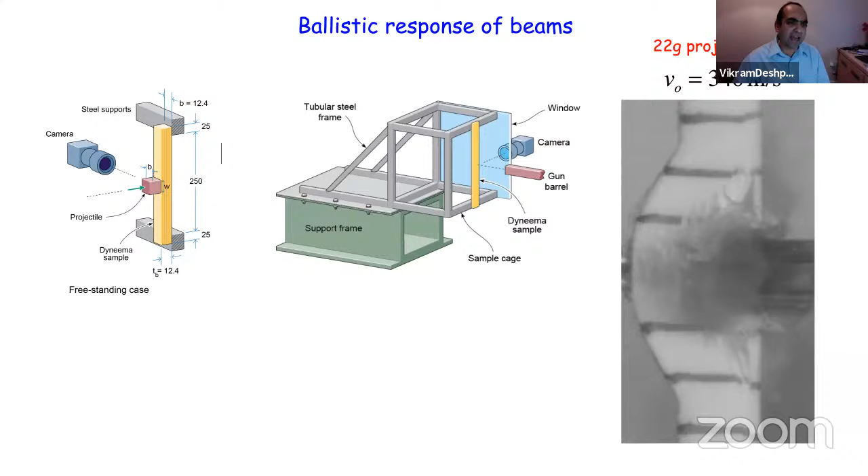Given all this, we'll return to the ballistic story. To remind you what the ballistic story is: the failure is all occurring underneath the projectile, as you saw here, is that all these fibers are failing. So the failure is occurring underneath the projectile. So why is this the case? We're going to use that model and basically try to simulate it, to try to understand this.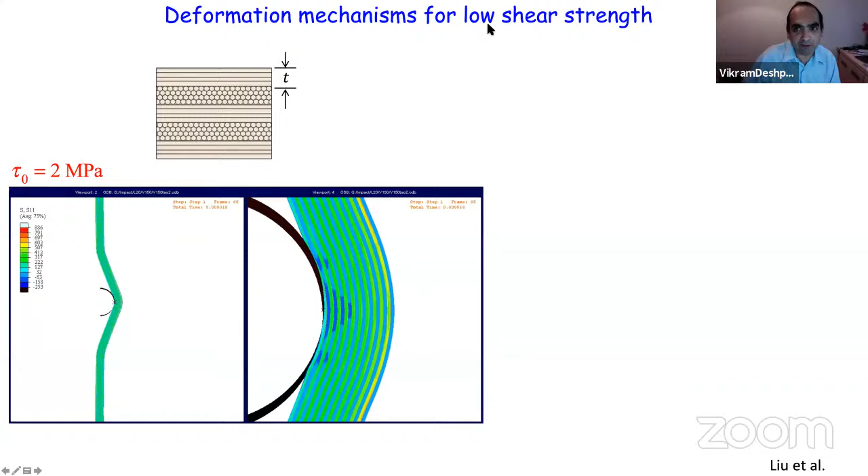And then you just get this kind of propagation of a shear hinge for a very low shear strength beam. This is what's happening: you get these very high stresses very early, which are what's breaking those fibers, and if they don't break there, you're not going to get failure. If you plot the ply stress underneath the beam as a function of depth, you can see you really need to model every ply discretely, because you're going from one ply being in tension to the next in compression and back to tension, etc. So there's this enormous inhomogeneity that develops because of this indirect tension mechanism underneath the projectile.

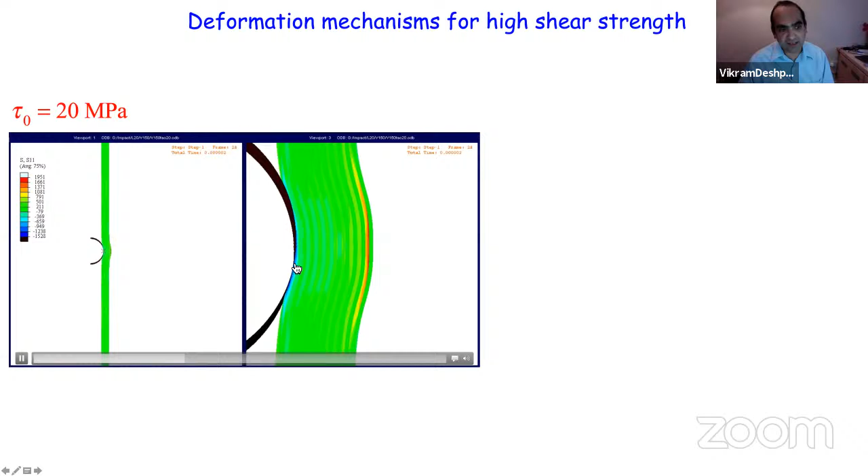Then if you go to high shear strength beams, something completely different happens: you completely change the mode of deformation and you get high stresses at the back, and you're going to get failure at the back of the beam. That's what happens in traditional carbon fiber composites.

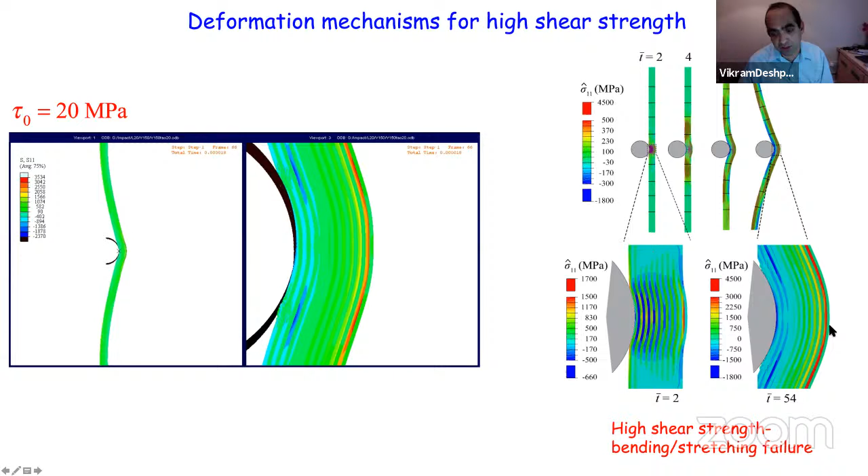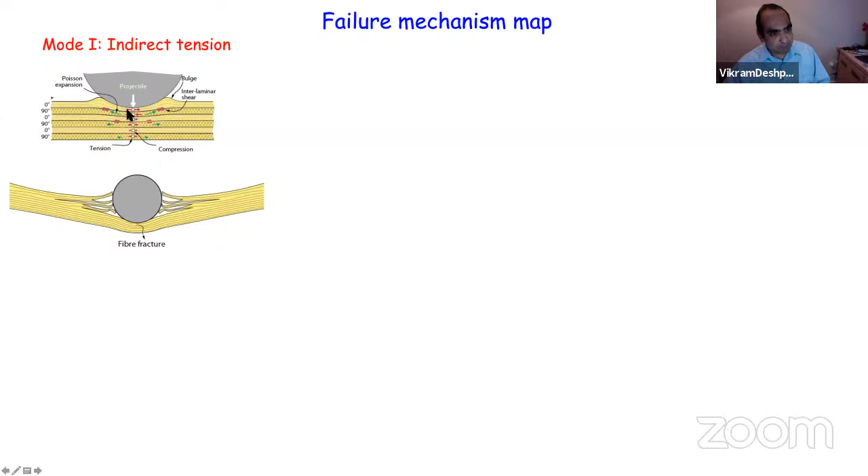So to summarize, you get two failure modes. One failure mode occurs at relatively low shear strengths of the beam, occurring not by that Cunniff mechanism, but by the development of this indirect tension - alternate layers of tension and compression underneath the projectile, giving a failure mode that looks something like this. At high strengths, you get modes where you develop a bending tensile strength at the back of the beam, and you get failure at the back of the beam.

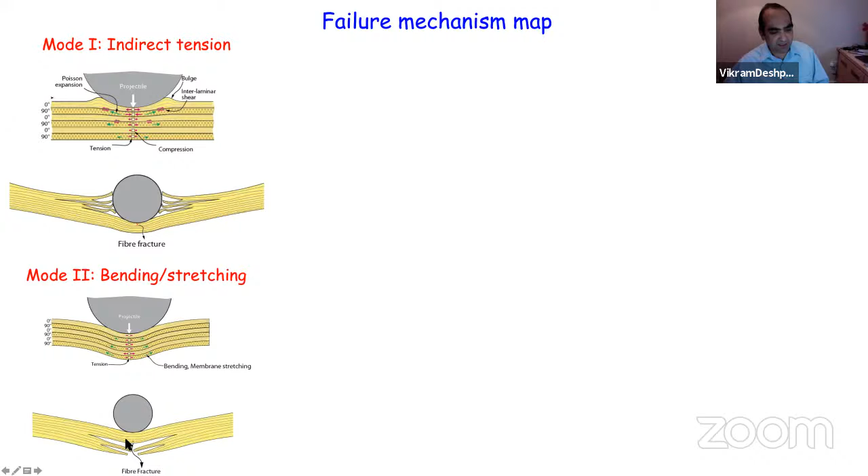Then you can develop a failure mechanism map - this is the map after doing many simulations. This starts to tell you there's something interesting in terms of the shear strength of the beam. There's an optimization here: if you go to very low shear strengths, there's no failure here, and failure here, so you want to be in this white regime where you'll do reasonably well. As you increase the shear strength a little bit, you maximize the ballistic limit, because at this shear strength you get failure at say 250 meters per second. But if you increase the shear strength any further, you hit mode 2, the bending failure mode, which reduces the ballistic limit substantially, giving poor performance. So it's very interesting - it tells you it's not sufficient to have high fiber strength, but you need an intermediate shear strength to actually get the optimum ballistic performance in this case.

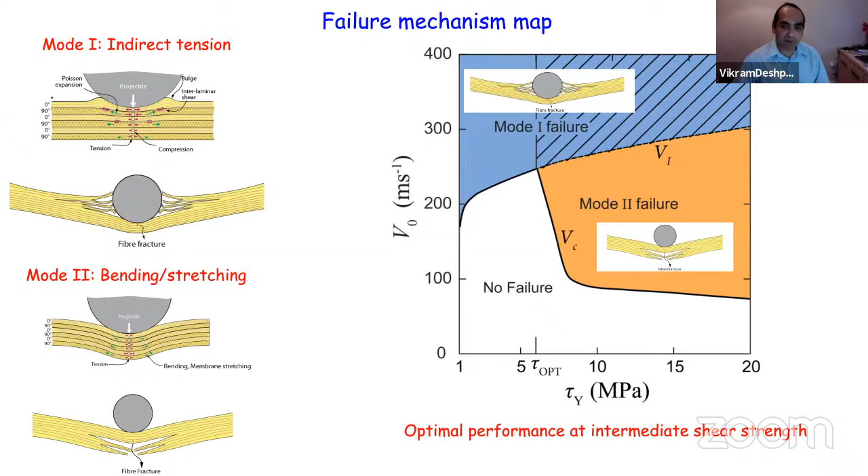So what has that told us about how to actually improve architecture to improve ballistic performance in these kinds of composites?

One obvious thing is, of course, if you increase the fiber strength, you're going to help. But in some ways you reach the limit to that - you can't do much more. So the question is, can you change the microstructure?

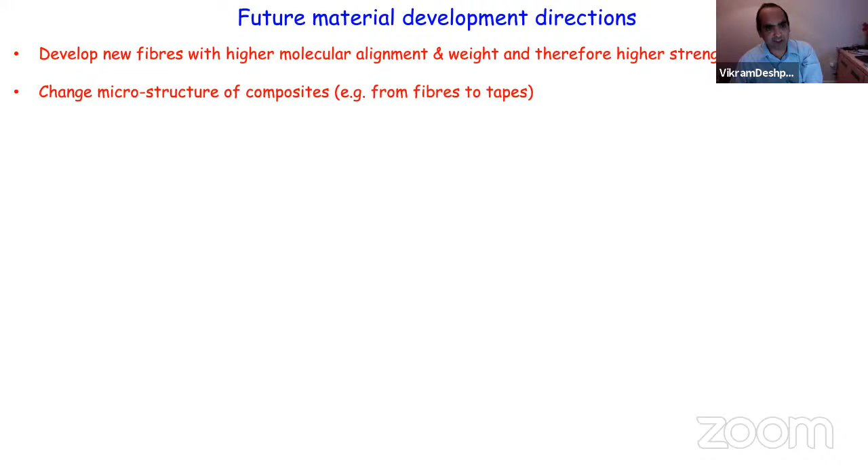So we are starting with fibers like this, and that's what we've been doing. But suppose we don't do fibers, and instead go to tapes, and you don't make these kinds of composites with microstructures that look like that, but tapes that look like that.

Now, the reason we were getting failure by that indirect tension mechanism is this Poisson effect, where effectively these layers of the composite were trying to expand by a Poisson effect and were putting these into tension. If you reduce this Poisson effect, then you're going to reduce the amount of tension generated in these layers, and that's what the tape-based composites are hopefully going to do for us.

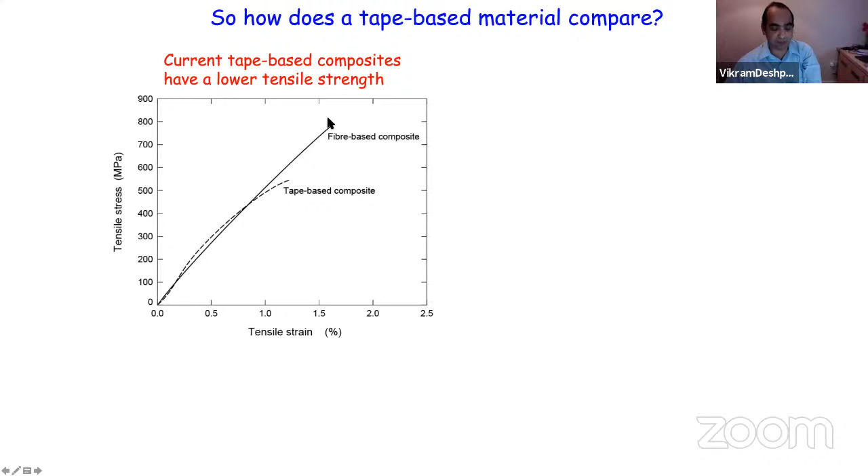That's what we are trying to do right now - this is now a tape composite. Current tape composites have a lower tensile strength compared to fiber-based composites. But when we do a uniaxial compression experiment, which is really what's happening underneath the projectile as we have seen, the tape composites are far better than the fiber composites even though their strengths are low. So we are hoping that tape-based composites will be better than fiber-based composites, especially if you get the tape-based composites to be the same strength as the fiber-based composites in tensile strength.

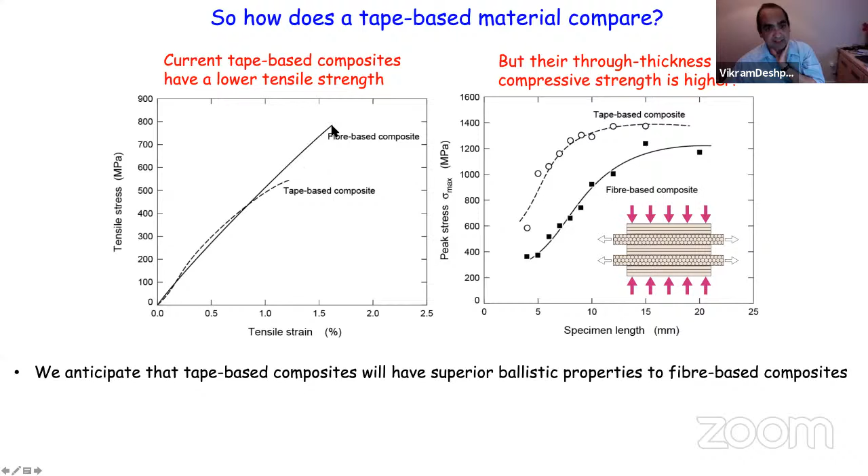This is important to increase the shear strength, because in principle, if you have a high shear strength, then you can start thinking of this as a structure - because right now these composites with 5 and 2 megapascal shear strengths are not structures, they are sort of parasitic when you use them.

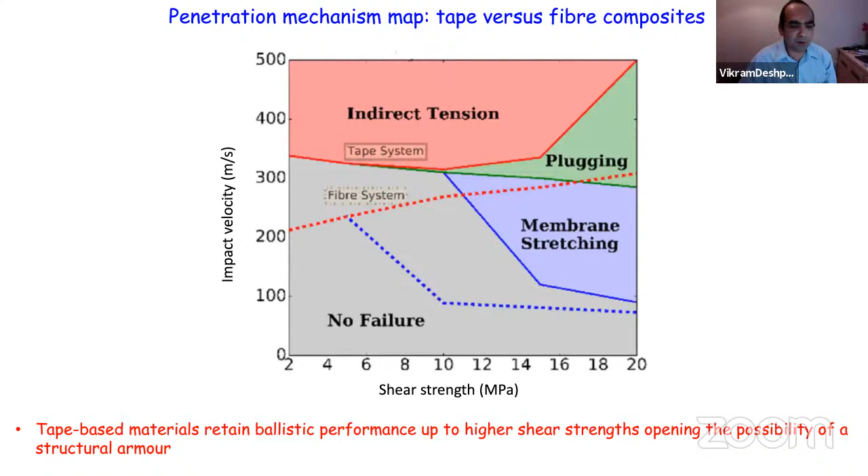So hopefully what I've told you from all of this is the following: architecture helps, and it's not always good to say that strong is needed for all kinds of applications, but you really need to understand what the mechanisms at play are. And if you understand those mechanisms at play, you may understand how to best design a material.

I see that I'm running a bit late, so the main thing I'll say is that you first need to understand the mechanisms, and those mechanisms can tell you how to improve architecture. Sometimes it may tell you that you don't need high strength, sometimes it may tell you need extreme anisotropy, but sometimes it will tell you need extreme strength, like for the bending of beams impacted by high velocity granular medium. But in nearly all cases, it will vector the development of new materials once you understand the mechanisms at play. Thank you very much.